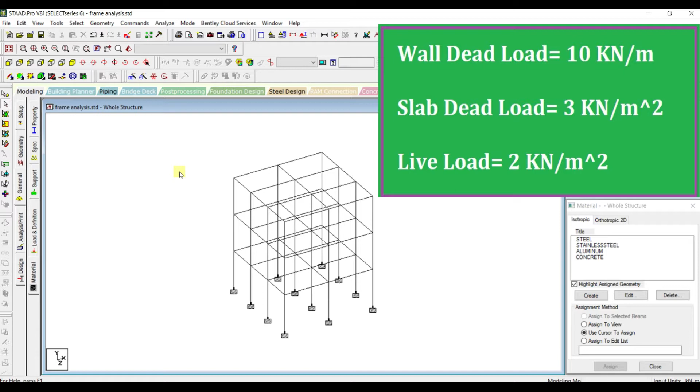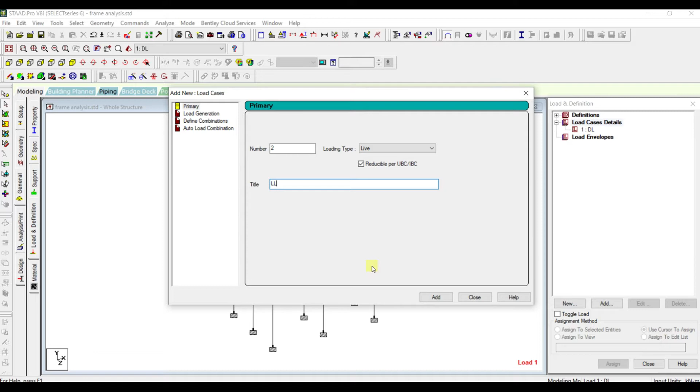Let's add all the load cases. To define the loads, left click on load and definition tab, go to the load case details, click on add. From the drop down, select dead. We have two loads, one is dead load, indicated as DL, and the second is live load, represented by LL. Click on add and close it.

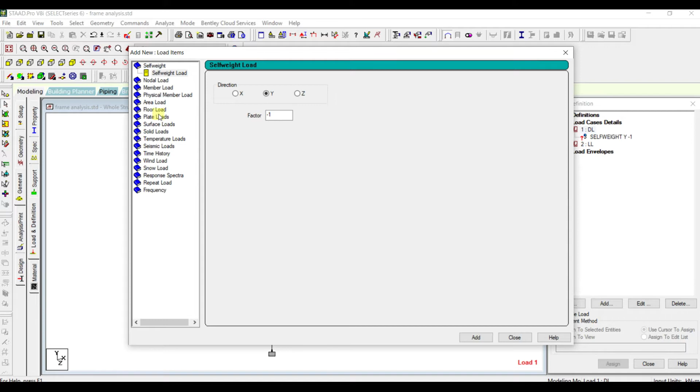Now let's add dead load and live load cases. Click on add here. First, assign a self weight factor of -1, and we have wall load of 10 kN per meter acting on the beam. Go to the member load. 10 kN per meter is a uniformly distributed load, so click on minus because it is acting vertically downwards, and click on add here.

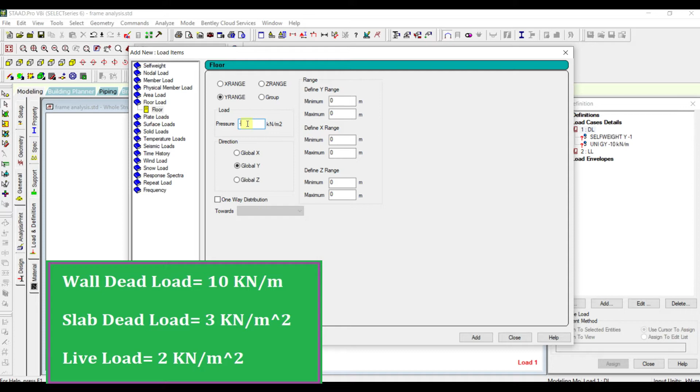Again, we have slab dead load of 3 kN per meter square. It is a floor load, so go to the floor load, and its magnitude is 3, so click -3. For assigning any floor load, we need to define the range of the floor. Here the floor load of 3 kN per meter square is acting on all three floors.

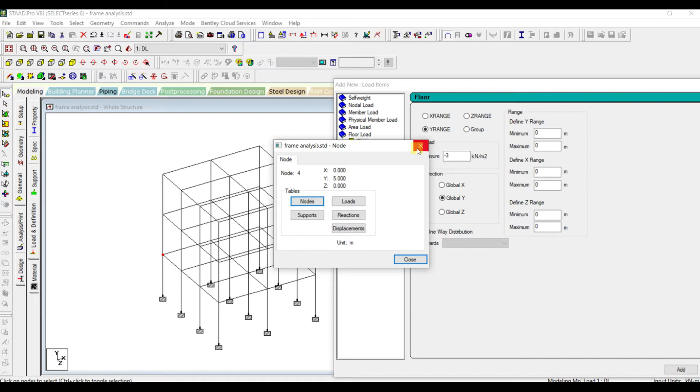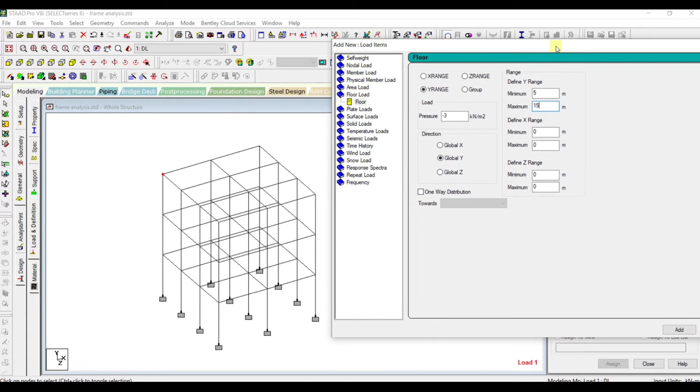So go to the node cursor, click on this coordinate. Here the y coordinate is 5, so define the y range as 5, and again click on this node at the topmost corner. We have y coordinate as 15, so enter the maximum value of y coordinate as 15. In this way we can assign the floor load to the given frame. Click on add here, and close it.

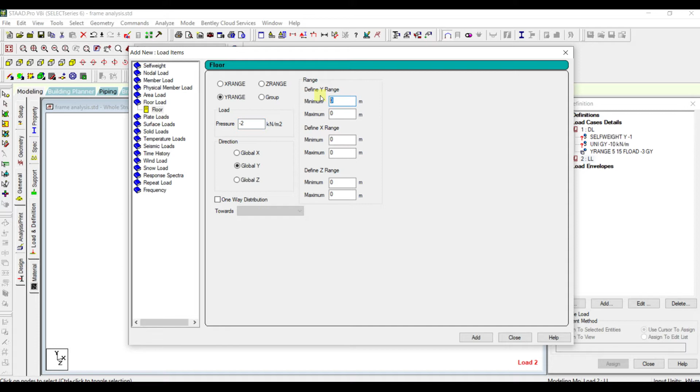Now let's define the live load. I have assumed a live load of 2 kN per meter square. Live load will also be in terms of kN per meter square, so it is also a floor load. Go to the floor load and define it as -2, and define the y range the same, 5 to 15, since we have 3 floors. Click on add here and close it.

Now you are seeing question marks. It means we have not assigned the load cases to our frame. To assign this load, just select the load case, and we must assign the self weight to the whole view.

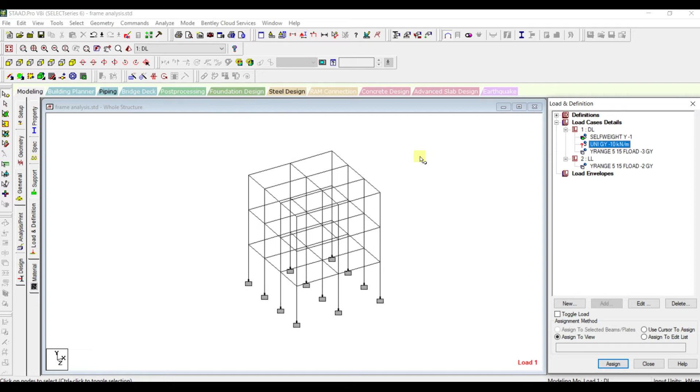This one, as I've already told, is the wall load coming to the beam. For assigning the wall load, we need to select all the beams here. To select all the beams, let's go to the view from +y, that is the top view, and left click on beam cursor to select all the beams. Press Ctrl on your keyboard and left click on all the beam members.

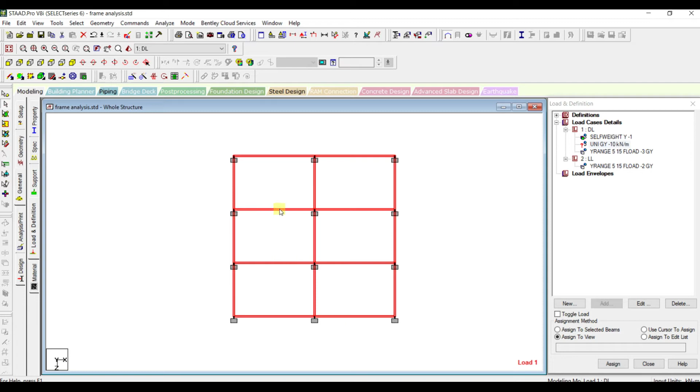Now check it in isometric view. Here you can see all the beams in this frame have been selected. This is one way of selecting all the beams; another way is to go to the select option and select beam parallel to X, then go to select and select beam parallel to Z. In this way also we can select all the beams.

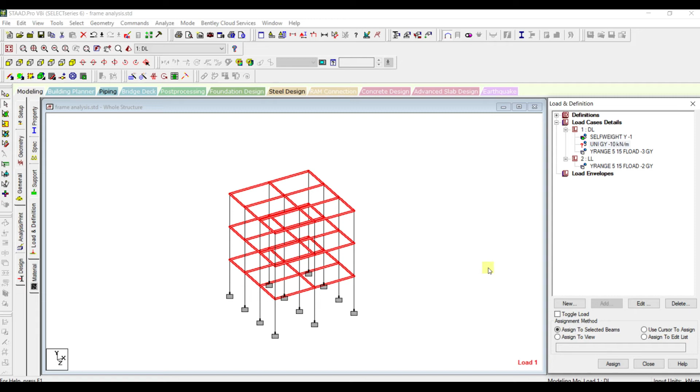Assign wall load of 10 kilonewton per meter to all these beams. You can see the wall load has been applied. Now, we have already defined the floor range, so it is acting here directly, and the live load is also applied automatically. Now all the loads have been assigned to this frame.

In the next video I will run the analysis.

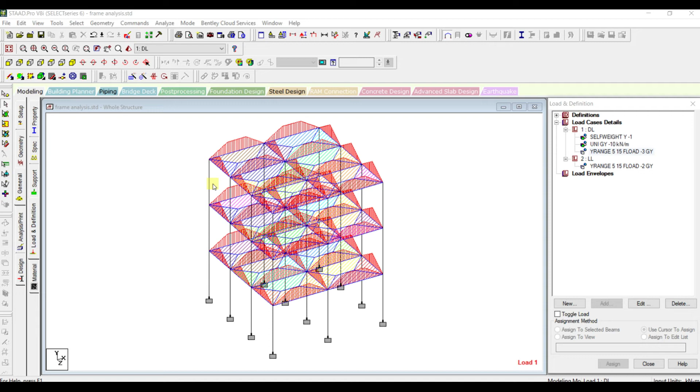One last thing I would like to add here is how to hide and show the diagram. You can just press Shift on your keyboard, Shift F to hide that, and Shift Y to hide the floor load distribution. You can press it again to show it. To see the floor load distribution, click on view from +Y, and you can see that the slab load is distributed to the beam in the shape of a trapezium.

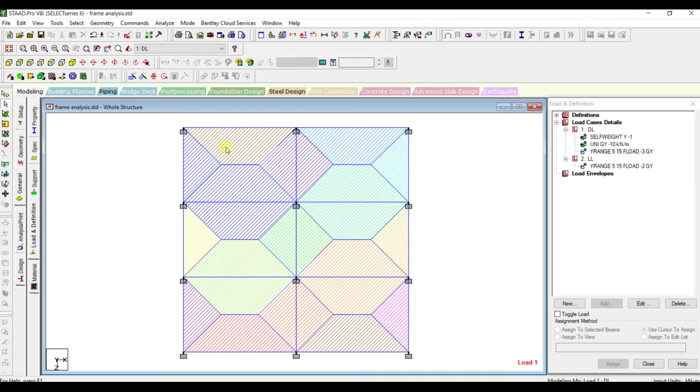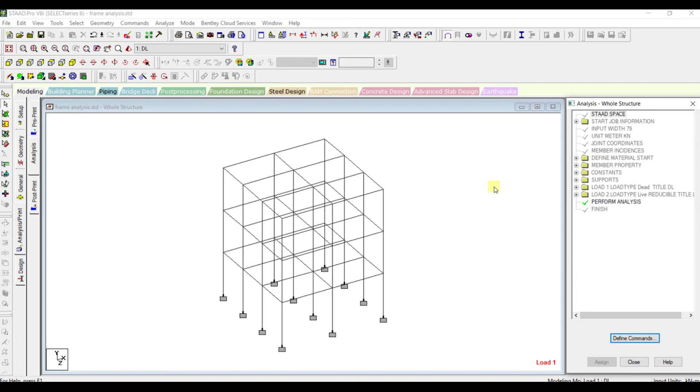Now on the left, go to the analysis print option, left click over it and select the no print option, click on add and close it. Now at the right you can see the perform analysis command has been added. Let's go to the run analysis option and click on run analysis.

You must ensure that there are no errors and warnings. In case if it appears, you need to rectify it.

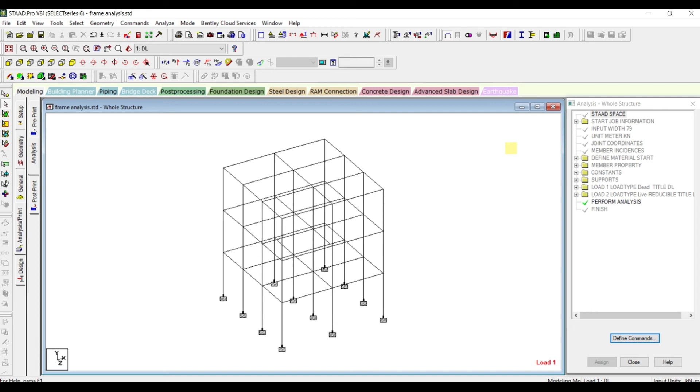This is the second last lecture of this section. As you all know, structural analysis deals with the calculation of loads, shear force, bending moment, deflections, and so on. To view the analysis report, we need to go to the post-processing mode.

Click on post-processing mode and select apply. Okay.

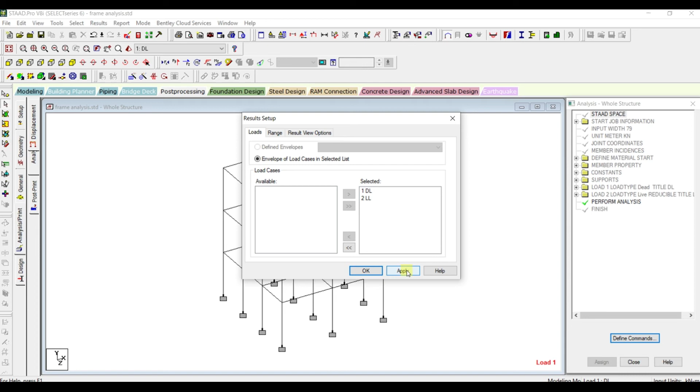Now you can see the analysis values. Click on reactions to see the reaction value of the supports, or you can click on moment along Z, or you can click on shear force value. You can see the value of moment along three directions, that is Mx, moment along x, y, z, and shear force along all the different directions.

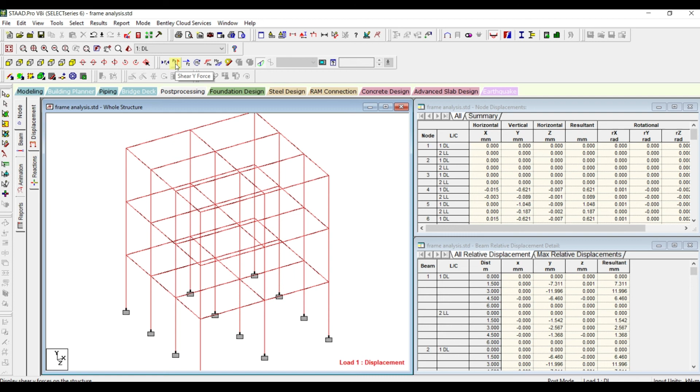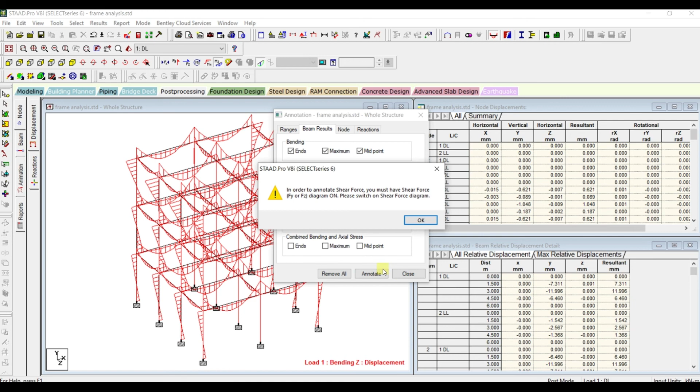Press Ctrl key and rotate the mouse to scale the diagram. At last, to see the value, go to the results and click on view value option. Go to the beam result and check all the values, shear and bending moment, and left click on annotate. You can see the value of different beams and columns. In this way, we can perform analysis of any building frame in STAAD.Pro.